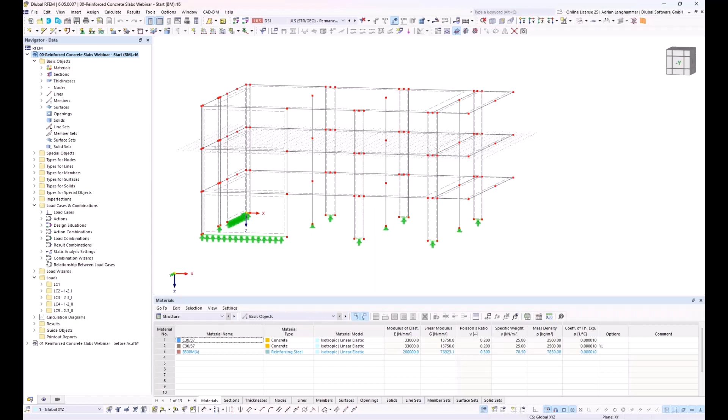So I will switch to RFEM, to our today's structure. This structure of today's webinar refers a bit to an older RFEM 5 webinar about reinforcing slabs and deflection calculation for slabs. That older webinar was a 2D position, today we show this based on a 3D structure.

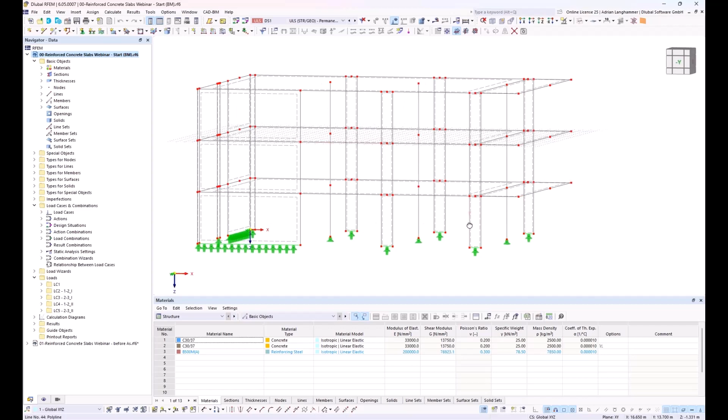This 3D structure has 3 stories. The slabs here in the right area are cantilevered. I have applied some simple but typical loads, a dead load and some live loads here.

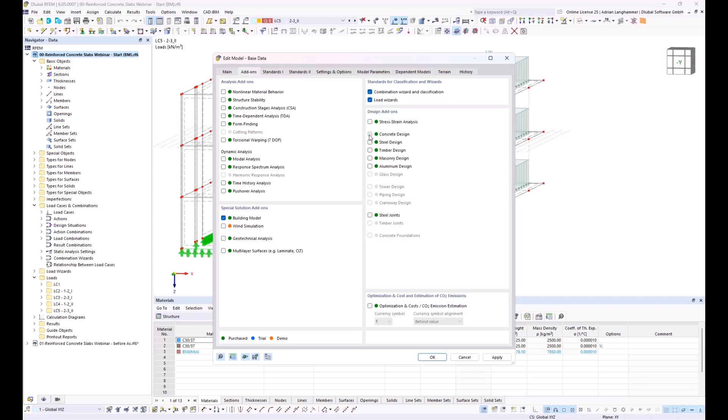In the beginning, I will use the building model add-on to consider the slabs not in the 3D structure, but separated in a 2D structure. Before that, I have to activate the building model add-on, which you find here. At this point, I will also activate the concrete design add-on, because we will need it afterwards.

With activating the add-ons, the input possibilities in the navigator change, and I have an additional entry called building model. I will start with the definition for the building model.

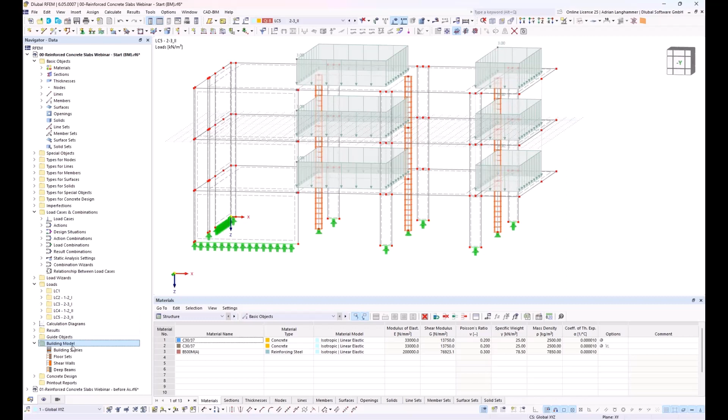First of all, I have to create building stories. I can do this by hand, or I can use this automatic function so the program automatically recognizes the stories and generates them. This is the button here.

Then I have to choose how I would like to calculate with this building model, and there is one option regarding the floor modeling, where I have to choose rigid diaphragm. This means that the walls and columns are connected via rigid diaphragm, and the slabs are considered as some kind of 2D position, as a 2D structure. It's not exactly a 2D structure, but it behaves like this.

For this slab, I have to choose how the attached walls and columns should be considered - they are considered as nodal supports and line supports. But here there's an option for how this should be done.

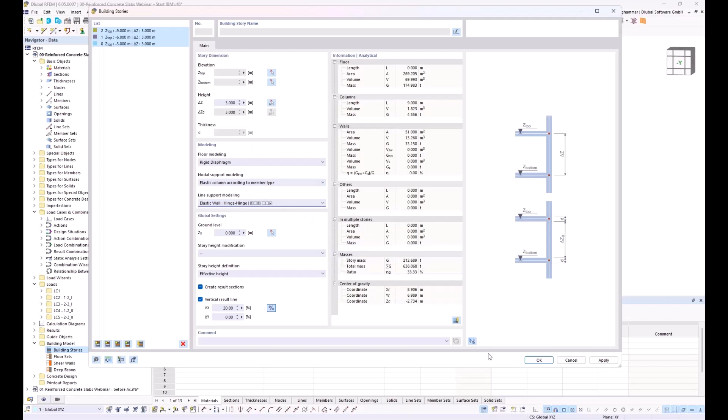So this is my input for the 2D calculation of the slabs. And then I could start to calculate the internal forces. This would need, let's say, half a minute or 1 minute, so I will save this time and switch over to a structure where I've already calculated the internal forces.

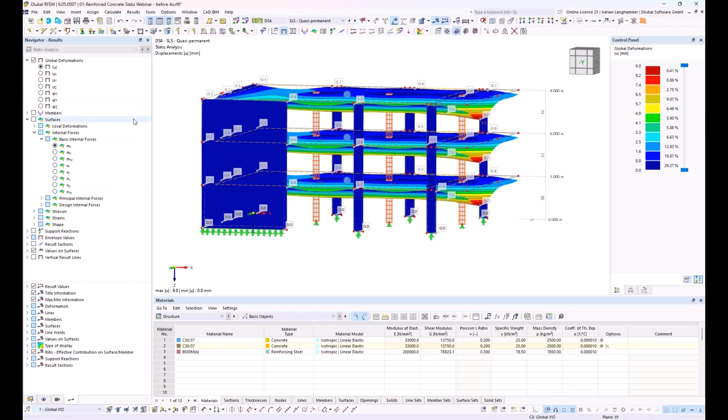And then you get results like, commonly for the statical analysis in RFEM, you get internal forces and deflections. But you have also an option, I can show it, where you could choose what kind of results you want to look at. So there are the common results from the 3D calculation, and there are the results for these, let's say, separated slabs. So these are the results which we use then for the concrete design.

Yeah, I also will show another point. The program, as I mentioned, calculates the walls connected via rigid diaphragm, and the floors as separated 2D positions, and it also calculates some load transfer based on a submodel which is calculated in the background.

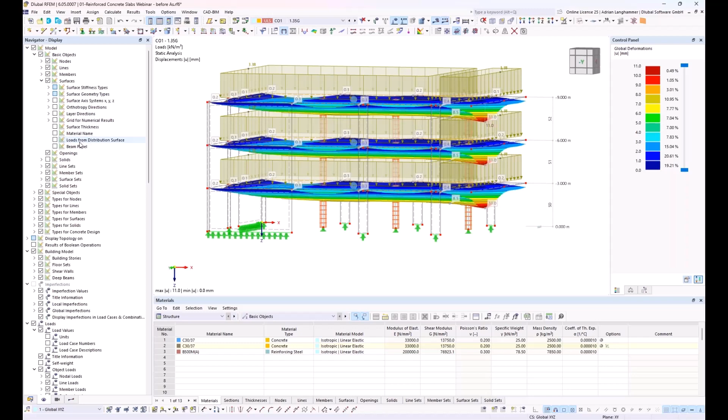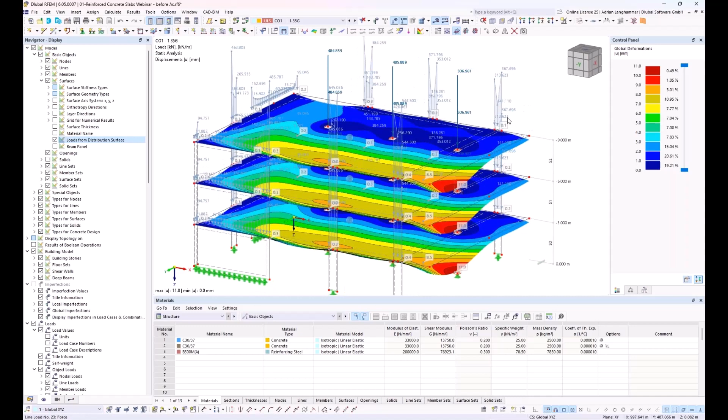And here you could see, if I go to the navigator display and the surfaces, I can have here an option, loads from distribution surface. So now I see the loads as I defined them as surface load, but I can also show how the program distributes the loads based on the submodel calculation. So I see how this surface load is distributed into the single parts of the structure.

Yeah, so this is our basic results which we use for the concrete design. And now I will start with the concrete design, and in the first step, I would like to calculate the required reinforcement.

I already activated the concrete design add-on.

The input for the concrete design you could find in, I would say, 3 main areas. There's an entry here in the navigator, concrete design, and there are the configurations with all the settings for the design checks, and also there's an entry for types for concrete design with input for the surface reinforcement, for example, and then there's also here in the table this point concrete design, where you could choose which objects you would like to design, and also which loads or design situations you would like to use, and so on.

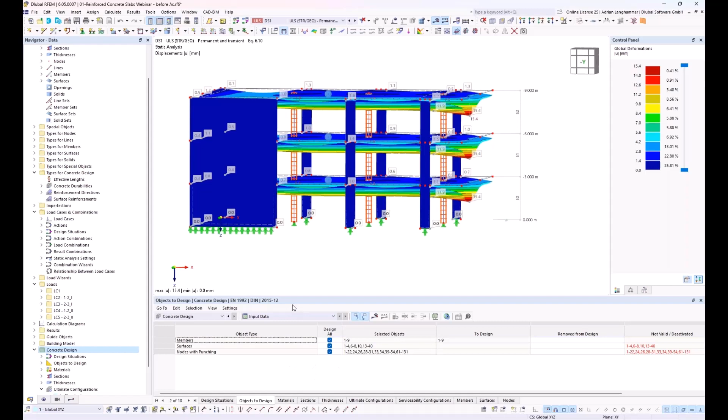So I will start, or I will do the concrete design for this slab in the middle here. So I show only this slab. I will turn off the results and take a look from the top side.

In the beginning, I will only design these 2 surfaces. So I will turn off the members and the nodes for punching, and I select here these 2 surfaces. And then I see here that they are at the moment not valid or deactivated, and the reason is that there is some input missing for the surfaces themselves. So this is, let's say, the 3rd area for the input.

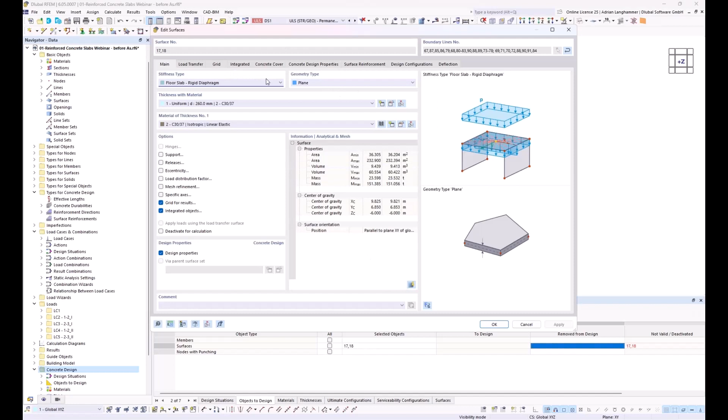The objects I've selected here for the design, in these objects I have also a concrete related input. So this is here. It begins here with the register concrete cover, and then the following registers.

So I can do here the input for the concrete cover. I could use it based on the standard automatically, or I could define it, or I could use it user defined. Then I have here the settings regarding reinforcement direction. By default settings, the first reinforcement direction is always located in the local X direction of the surface. I keep here everything as it is.

And then I go to surface reinforcement, and here I have to do an input. It is necessary to define a reinforcement or a surface reinforcement here. It is not necessary to do it absolutely accurate, but the program needs some diameter for the calculation, for example, and it also needs some input for the axis for the reinforcement, because these inputs are influencing the effective depth or the inner lever for the concrete calculation.

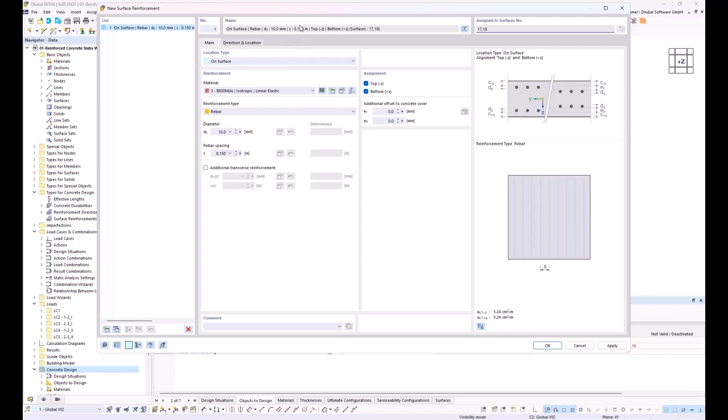So here I start with some basic reinforcement. I define a mesh Q424A at the top and bottom side for these two surfaces, and here I can see what the program then uses as an existing reinforcement. And I say OK or apply, both possible.

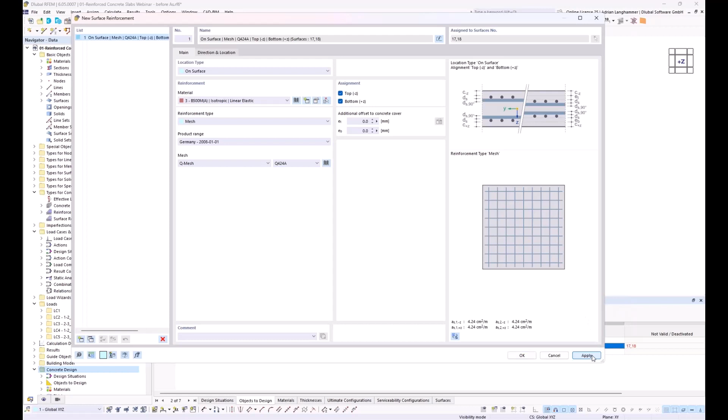In the background I see that the dialog is a bit behind, and I see that the surface is switched from not valid to design.

So I will close the dialog, and here in the next register, design configurations, I have the related configurations for the design, so the ULS and SLS configuration. And then the last register is about the deflection. This part I will show later.

So I will open the ultimate configuration and the serviceability configuration. First, the ultimate configuration. Here I can do settings regarding the ULS design, for example regarding minimum reinforcement, regarding shear capacity or shear checks, and so on. This is default. These settings are related for slab design, so I keep everything as it is and close it.

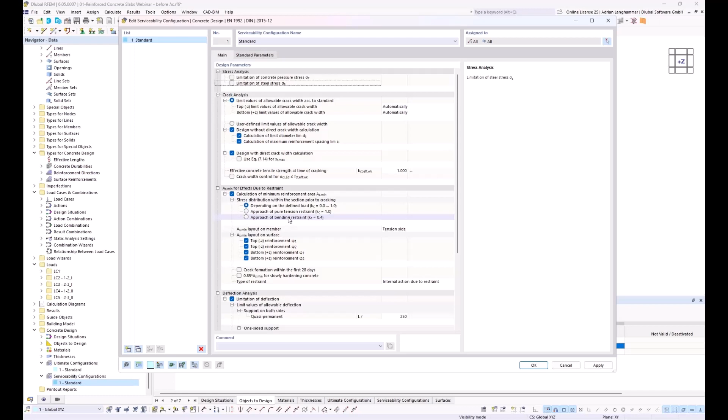Then I will open the serviceability configuration. It's quite similar. I have settings regarding the SLS design checks or for the SLS calculation. Here I would like to turn off the steel stress analysis because it's not necessary in each case. I also will adapt here the setting for the stress distribution for the effects due to restrain.

So I will use bending restrain because I know I have here a slab, and the program has some automatism or automatic function to determine the stress distribution based on the load, but this is not necessary if you know what kind of restrain you would like to consider, and I know that I would like here to consider bending restrain. At least I will deactivate the deflection analysis.

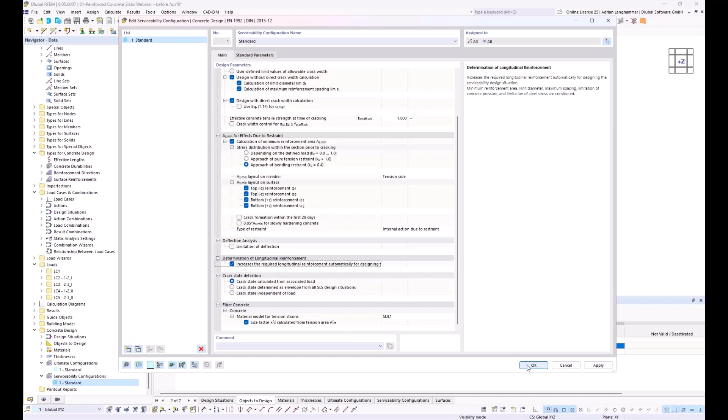This is an option I will use later. Then I have here this option which is activated by default settings, that the program increases the required reinforcement automatically also for the SLS, and here you have summarized for which design checks this is used. So I keep this option on because this is my first step. I would like to calculate the required reinforcement.

So now the input is done, and I could start the calculation for the required reinforcement. And as mentioned, the program now calculates the required reinforcement for the ULS in the first step, and then for the SLS.

And this is one way how you could work with the program. So this could be a step how you handle your structures by calculating the required reinforcement.

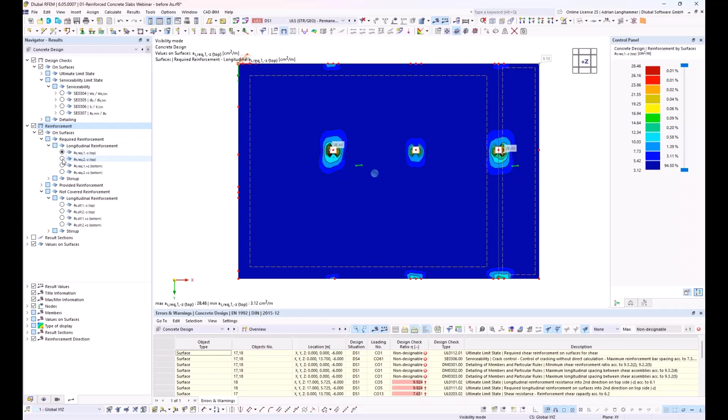When it is calculated, you have here in the result navigator for the concrete design this point reinforcement, and then you could have a look at the required reinforcement at the top side in the first and second direction, and at the bottom side also in the first and second direction.

At this point, it would be theoretically possible to document the results, and then you have your concrete design. But you could do also a bit more.

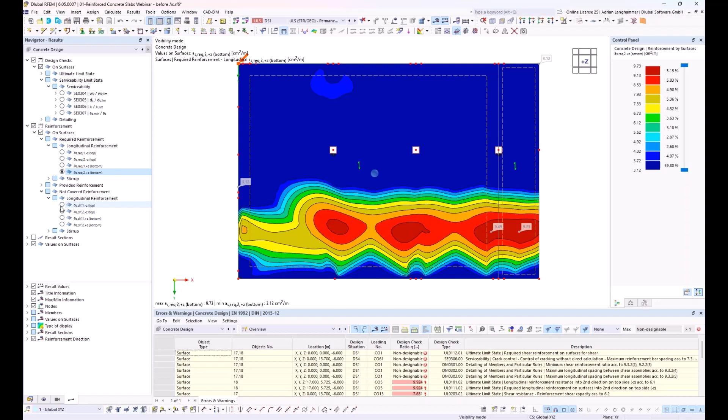But first I would switch here from required reinforcement. There's also another option, not covered reinforcement, which shows the difference between the existing reinforcement, which is between the provided reinforcement, which is the 4.24 square centimeter, and then I could use here this difference. So I see where this mesh, which I've chosen as basic reinforcement, does not cover the required reinforcement.

So based on this, I will do an input for the existing reinforcement.

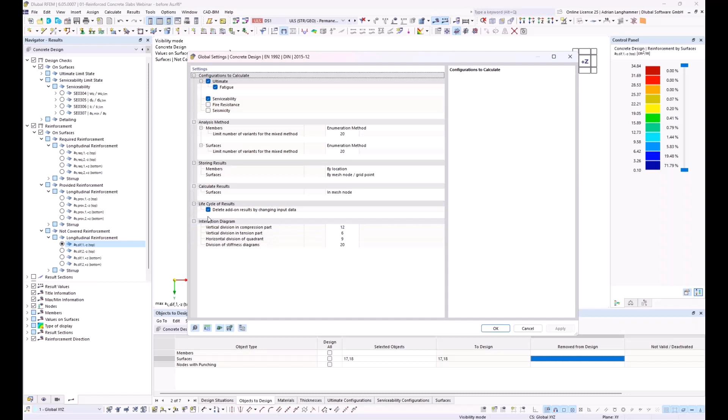But first, I would like to freeze these results because I would like to use them via input. There's an option here in the input data that I could say, if I change here something for the input, like the reinforcement, the program should not recalculate. It should keep the old results because I could use them via input, and then when the input is done, I could activate this again, and the program recalculates. So I turn this off, and then I will define the reinforcement, and I will start with the reinforcement above the supports.

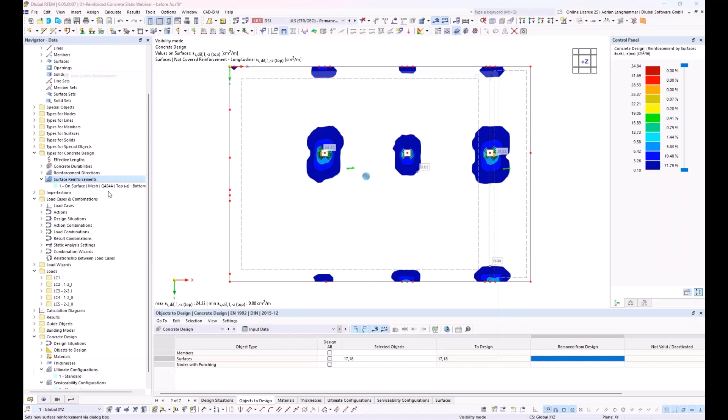And I have to go to the navigator, and here's surface reinforcement. There's also our existing mesh basic reinforcement. I create a new surface reinforcement, and this time not for the whole surface. I would like to use a free rectangular reinforcement only at the top side, assigned to these two surfaces, with diameter 20, and also for the transverse reinforcement, also diameter 20.

Then I would not do a direct input of the rebar spacing. I would use the automatic function, the automatic design of the existing reinforcement. So if I click here auto, the program automatically determines the rebar spacing. I have to give a minimum and maximum value. I keep the default settings, and for increment I use a bit larger increment, 5 centimeters, and I do the same for the other direction and say OK.

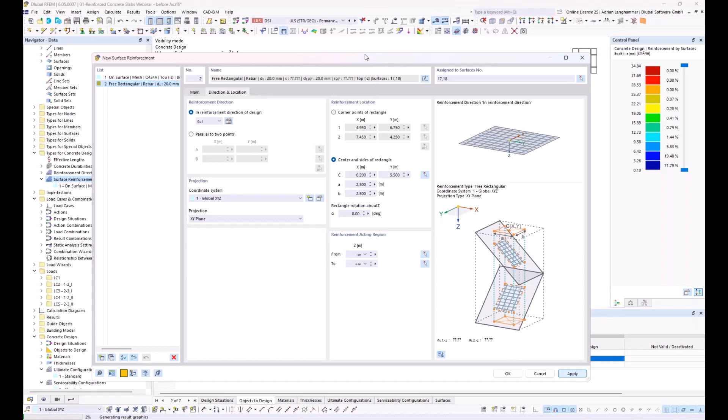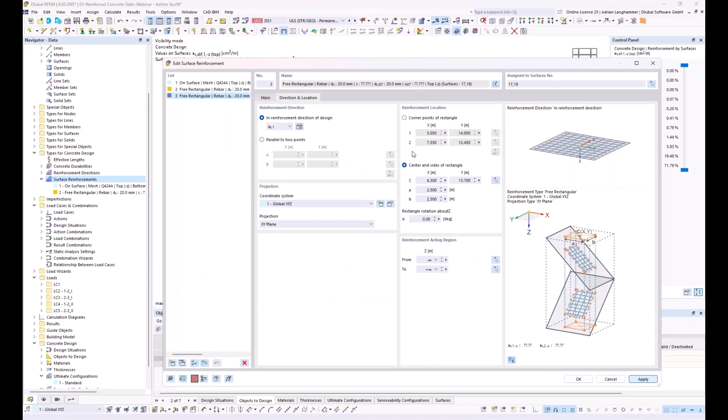And then it should show the reinforcement. I could also, to define the other reinforcement areas, use the copy function. So it keeps exactly the same settings, and then I only have to change the location here. I can click apply, and again for the other one here, apply, and then I have defined the other reinforcement areas very easily.

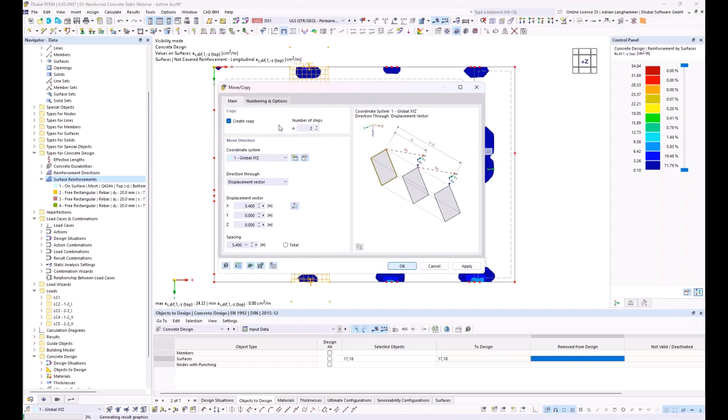There's also an alternative way. The surface reinforcement is like every other object in RFEM. It behaves like a surface or like a free load. I can select the surface reinforcement and use the copy function and say, for example, create 2 copies, and then I could pick my vector from start to end point and say OK, and then the program copies the reinforcement 2 times.

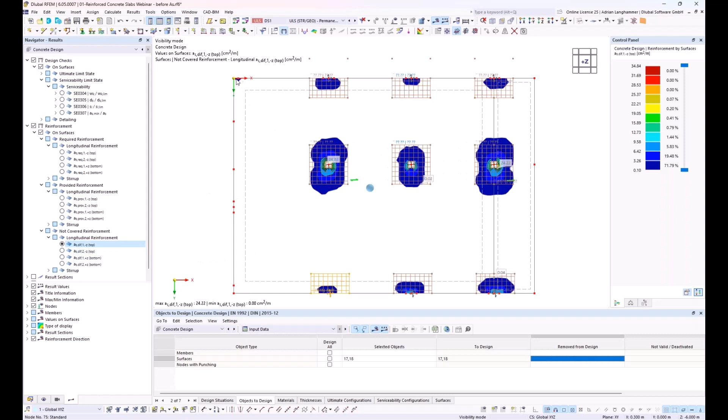I have here in this area also some supports where there is also some not covered reinforcement in direction 2, and I guess in the upper corner there's also a small area here. I would also like to use this reinforcement for the support, so I copy it another time for this point, and for this point, and for this point, and say OK. So now I have defined for all areas where not covered reinforcement is above the support, this reinforcement here.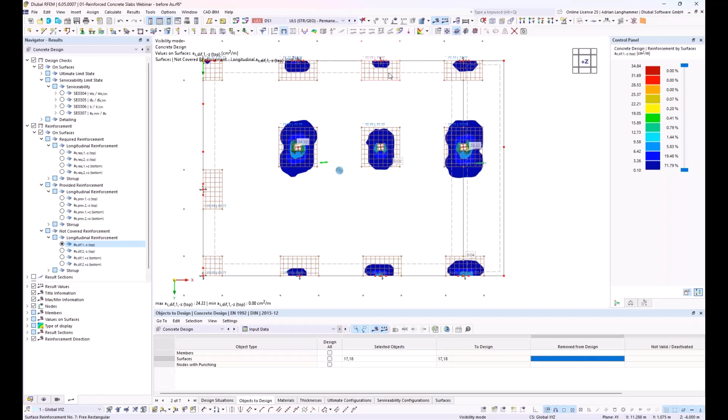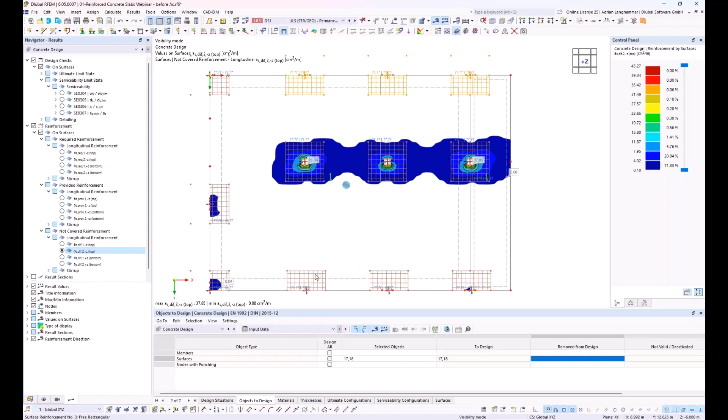It's not necessary to have for each reinforcement area 2 directions. For example, here these 3 upper columns, there is not covered reinforcement in direction 1, but not in direction 2. Also here, there is no required or not covered reinforcement in direction 2. I would like to show how you could adapt the reinforcement. So I could choose these 5 areas here, this 5 reinforcement, and say I don't want to use the second direction, and say OK.

Here it is the same. I forgot this, here it's the same. There's also not a not covered reinforcement in direction 2, and here for these 2 it's vice versa. There is no reinforcement in direction 1, or the not covered reinforcement is 0 in direction 1, but in direction 2 there's some not covered reinforcement. So therefore I could also adapt these two. It's a little bit different. Here I have to switch off also the transverse reinforcement, but I have to say that the first direction is not in direction 1, it is in direction 2, and say OK.

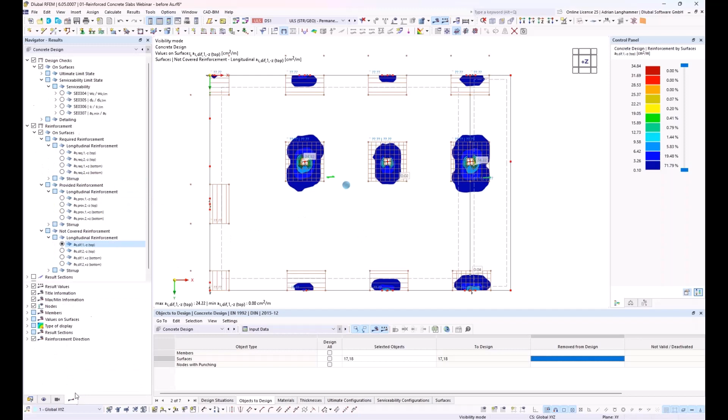And then I have everything adapted as I would like. There is some reinforcement here in between these supports, so I will create another area at the top side here. I say new surface reinforcement, rectangular. Choose these two surfaces, and this time I define the diameter and the distance.

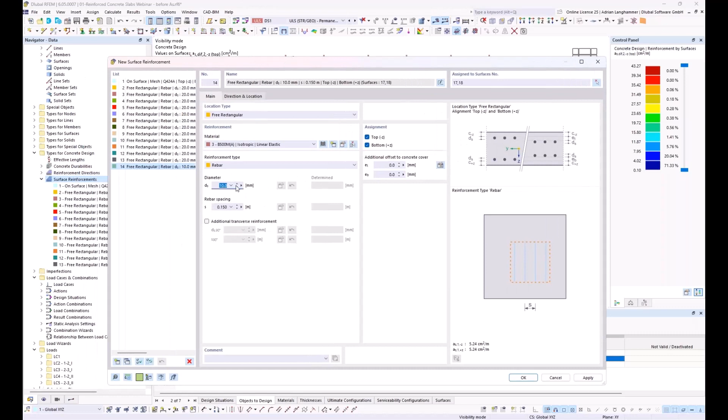I would like to use diameter 12 at 10 centimeters. Here also for the transverse reinforcement, and I have to check only at the top side. This time I use this definition by corner points. So I have a grid in the background, and I could here choose every half a meter. This grid could also be adapted. I use the grid with half a meter, so I can define it here graphically like this, for example, and say OK.

And then I have a, it looks... moment, I did some mistake here. You could always use the graphic to check if the input was correct.

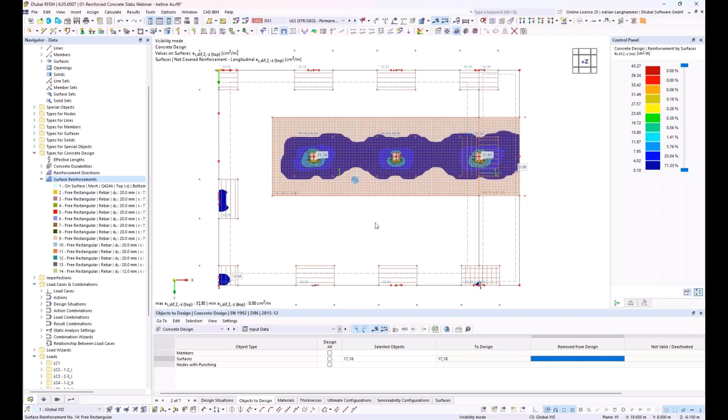And then I have to define also two reinforcement areas for the bottom side. There's an area here where a not covered reinforcement occurs, and also here in this area in direction 2, mainly, and also a small reinforcement in direction 1. So I define for these areas also an existing reinforcement.

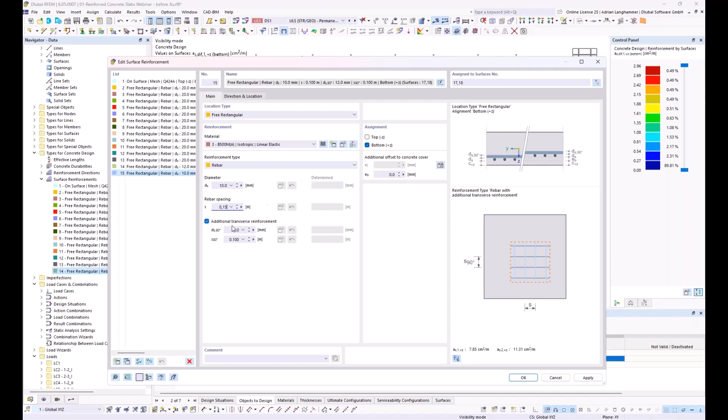This time I use the copy function again and copy my last reinforcement and switch to bottom. For the first one, I would like to use diameter 10 every 15 centimeters. In this area, let's say from here to here, and apply. I could check it, yeah.

And then another area, or another reinforcement at the bottom side here. In first direction, I would use 10 at 30 centimeters, and in the second, 10 at 10 centimeters, like this. And I use it for this whole area here, and say okay.

And then I'm ready with my input. So I could now start the calculation again, and with starting the calculation, the program will automatically adapt the reinforcement.

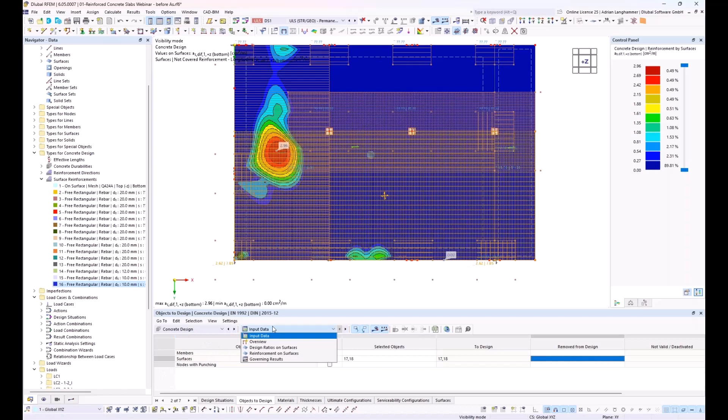So I go to the input data again, and I switch off this option. Say okay, the results are deleted. I could calculate again, and now I see that something changed a little bit for the calculation. I have now two concrete entries.

The first calculation is the required reinforcement. So with changing the reinforcement, there could be also changes regarding the inner lever arm or the effective depth, depending on the defined reinforcement. And the second calculation is the automatic design of the existing reinforcement.

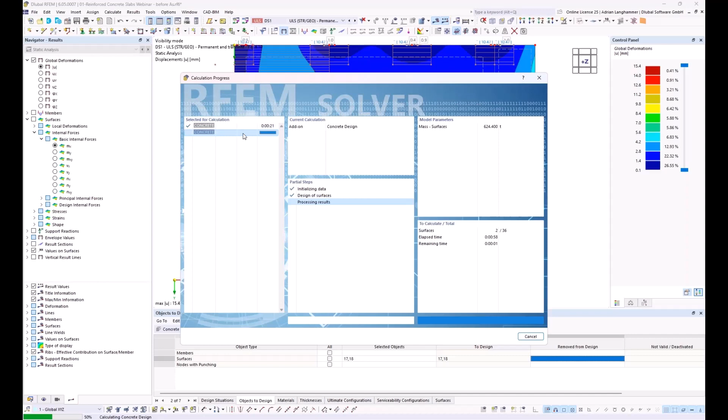So in this step, the program automatically decreases the rebar distance until the point that the required reinforcement is covered. There could also be the case that there is no solution, but then you should see the minimum distance. So in such a case, you maybe have to adapt the diameter, for example.

So now the calculation is done, and I could have a look at the results. Maybe I start at the top side with the not covered reinforcement. So now the not covered reinforcement is 0, and also in the second direction is 0. So in these areas where I used this automatic reinforcement, everything is covered.

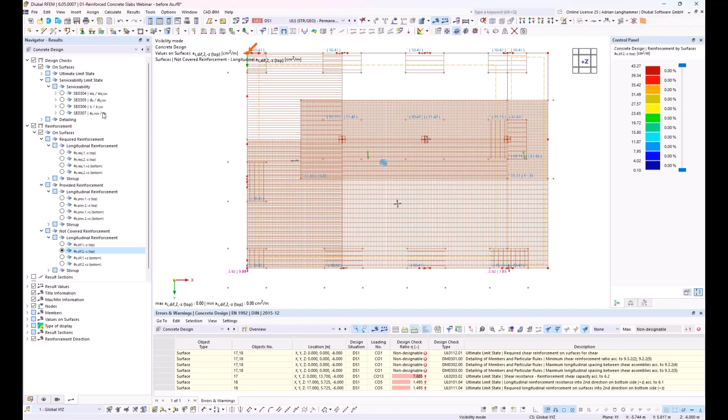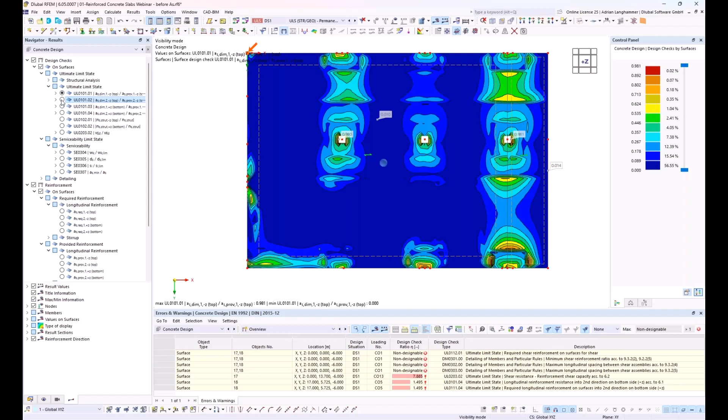So I see here the design check for the ULS. Everything is below 1, so everything is fulfilled at the top side here, both directions.

I could also have a look at the serviceability, at the crack-width design check, for example. I could here have a look at the ratio. The ratio is smaller than 1.

For the top and bottom side, I could have a look directly at the crack-width. So here I see the crack-width value in millimeters. At the top side, the resulting crack-width, and also at the bottom side.

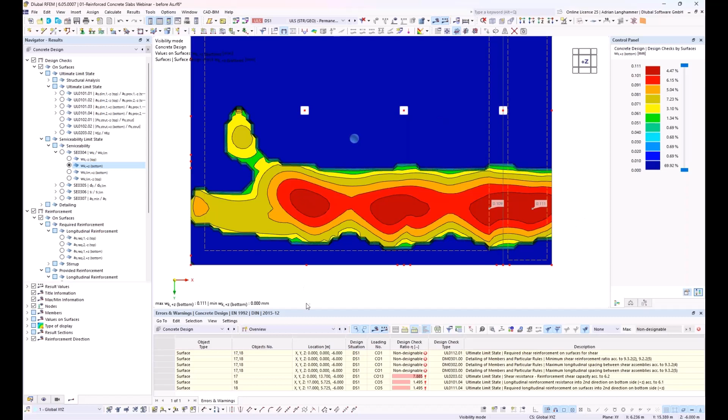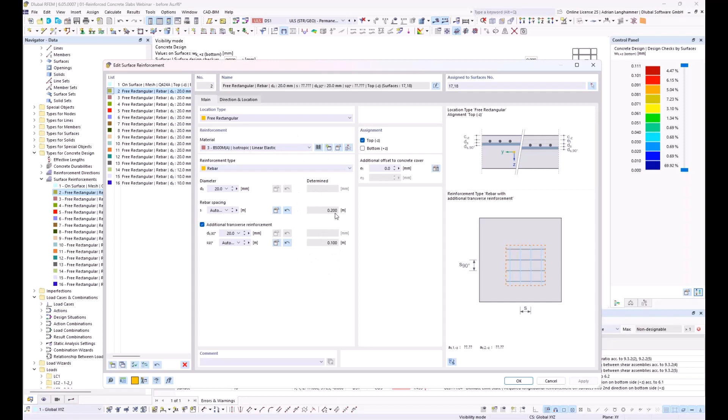So this should show the possibilities I have here with this automatic reinforcement. And if I say okay, the program determined this distance, I can see the value here which was calculated. The program calculated this value, and I would like to use it as an input now.

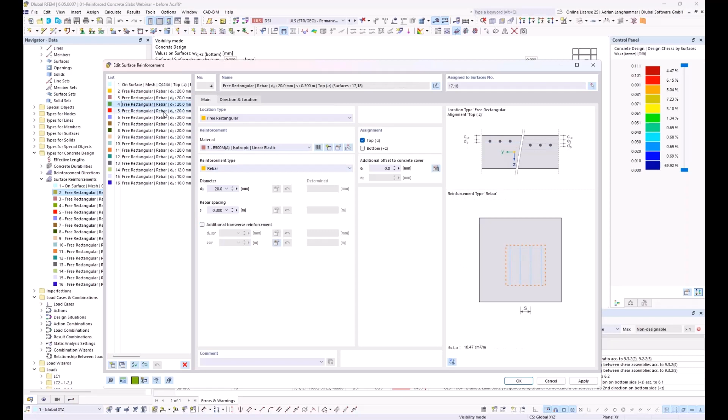From now on, I could select all these. I could do it for each reinforcement separately by clicking these arrows, but I could also select all these reinforcement areas where I used this automatic function, and say with this function it should use the determined value for the rebar spacing in the input.

And then I could say okay. And from now on, it does not need to recalculate the automatic function in the next calculation or for following calculations. So this is ready. The definition of the existing reinforcement is ready.

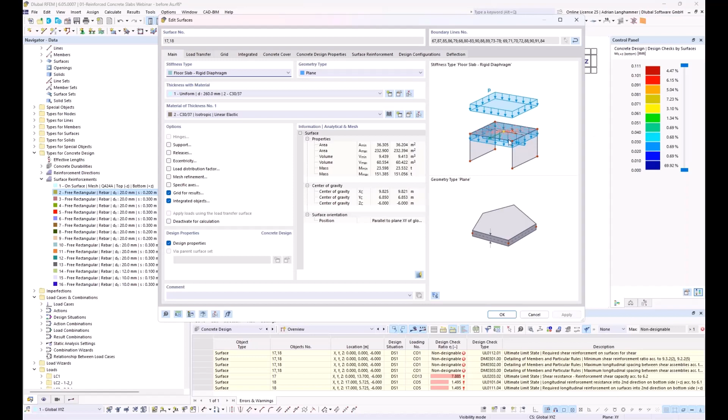Now, as a last step, I would like to do the deflection calculation and also the punching design. I will check at the beginning the input for the deflection calculation. I have to do it separately, one moment. There's an input here for this surface. Regarding the deflection, I could here select the surface type.

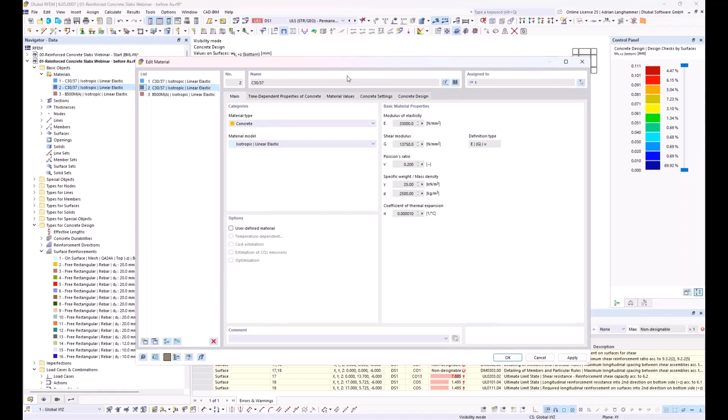I also have to check if creeping and shrinkage is activated. This is a material-related property, so if I open the material here, I have an additional register, time-dependent properties of concrete. Here I could activate creep and shrinkage, which is used for the deflection calculation. Here I also see the input for creeping and shrinkage, regarding the calculation I showed today. The creep coefficient diagram is for visualization, based on one thickness.

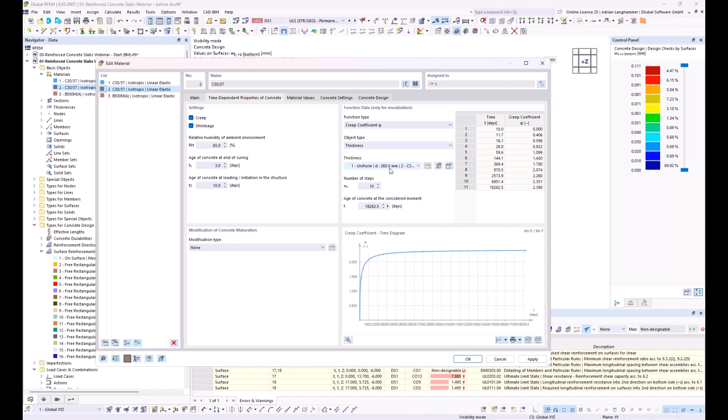So creeping and shrinkage is activated. The reference length for the limit value for deflection is defined, and then I could check the serviceability configuration. I can now activate the limitation of deflection or the deflection analysis. Here I see the different limit values based on the type of support of the surface, if it is a cantilever or both-side supported. It uses different limit values. Then in this step I will also deactivate the determination of the longitudinal reinforcement, because we have already defined our existing reinforcement, so I don't have to use this calculation again - this saves a little calculation time.

And I say okay - of course the results have to be deleted, but before I recalculate, I would also like to activate some nodes for punching. So let's say these 3 nodes or points at the columns should be used for punching.

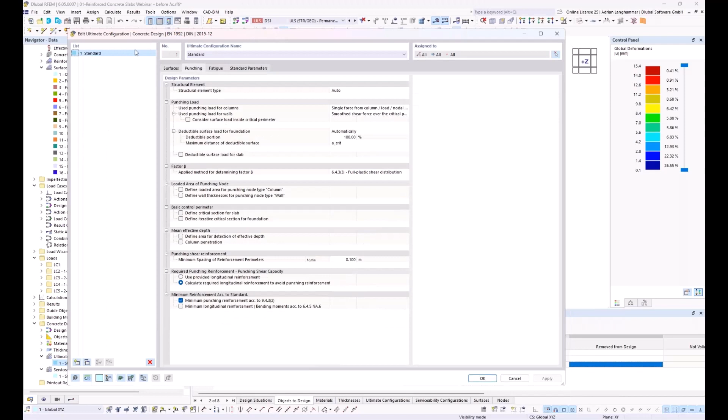Punching design is also like surface design - you have the object with the input, which for punching is the node. If I click on the node, you find that punching design is performed, and then you have a related ultimate configuration. With selecting some nodes for the design, I get this additional register for punching, where you find every option for the design, or how this punching load should be determined. There are a lot of different settings, but I would keep everything as it is and use the default settings.

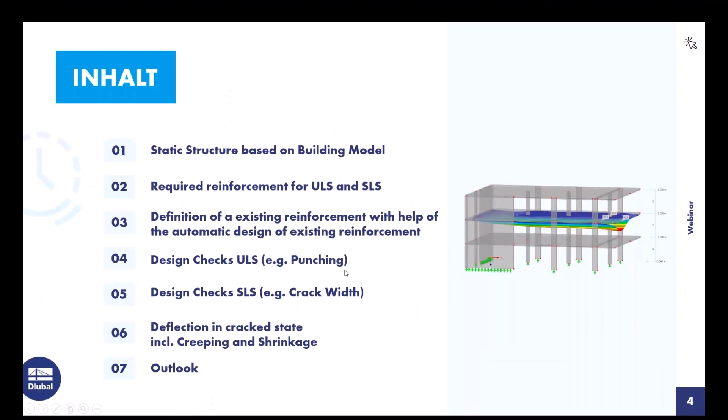And then I recalculate again. But I'll use this calculation time to switch back and give a short explanation regarding the deflection calculation we use here for our concrete design. This is the deflection calculation according to Eurocode 2, 7.4.3, and it's based on a distribution coefficient zeta.

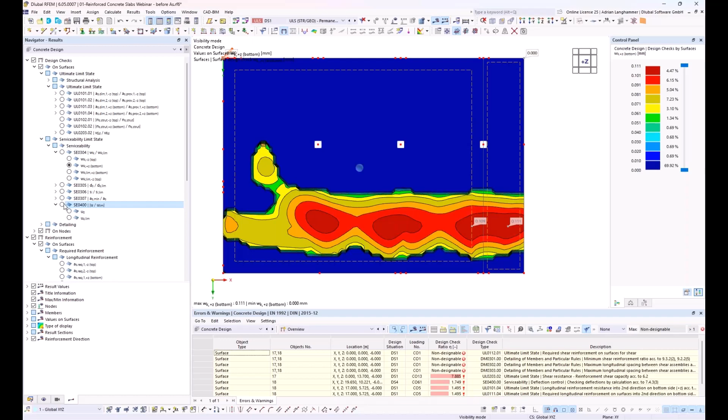So now the calculation is finished, and for the design checks I have an additional entry for the deflection calculation. I could have a look at the ratio, and I see the ratio for the deflection calculation, but I could also look at the deflection value itself. Here it says I have 4.6 centimeters of deflection, which would mean the deflection is not okay for this situation - it would be a bit too large. So there are different ways to handle it.

One possibility would be to increase the thickness of the slab. Maybe there's also an option to reduce some weight in this area. Of course, the longitudinal reinforcement could also be increased, or I would consider a hock for the formwork, so that I have a hock in the upper direction for the formwork to cover this deflection.

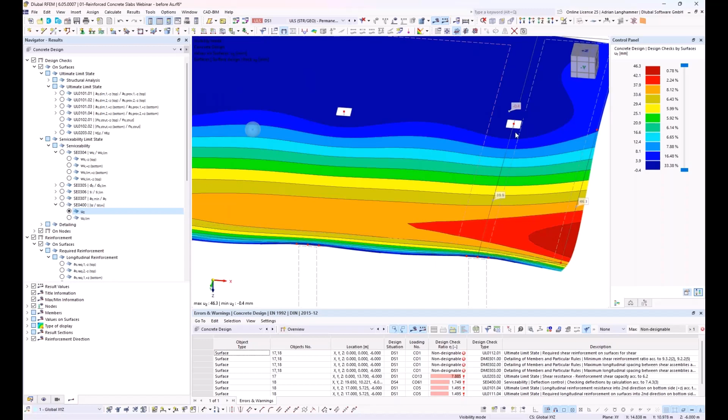I also could compare the deflection a bit. Here I have the deflection for the concrete design. I could also have a look at the uncracked state value for the deflection. If I switch back to statical analysis, quasi-permanent load, here I have the 9 millimeter, and compared to that I have the 46 millimeter, which is from the factor.

It seems plausible. I could also take a closer look at the deflection results in the design check. For example, if I look at this point here at the deflection calculation, I can see the detailed calculation with all the intermediate values. So the whole program is not a black box. You see every calculation step here.

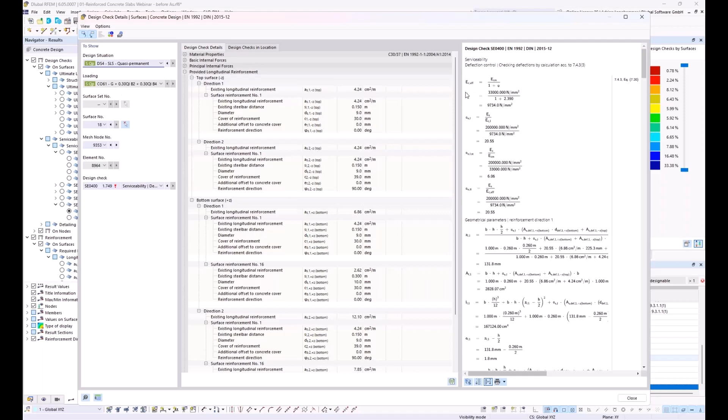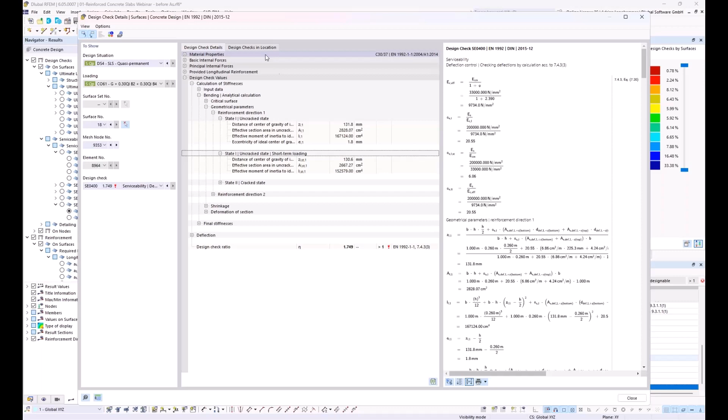Also for the deflection calculation, I could look at the calculation in uncracked state, in cracked state, and all the stiffness values. If you would like a closer look, showing these design check details is possible for all design checks calculated in the program, not only for the deflection calculation, but also for crack width and so on, also the ULS calculation or the punching design and so on.

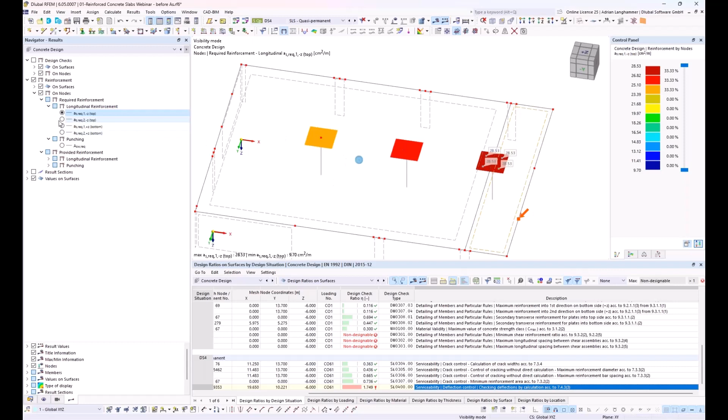In the last point, I would like to have a look at the punching design. If I use the punching design here, I have results on nodes where I could, for example, look at the required reinforcement for a node, like here, required reinforcement at the top side. The program with the default setting always tries to increase the longitudinal reinforcement to cover the punching. But I could also use the existing longitudinal reinforcement, and if that existing reinforcement is not enough, the program will calculate the required reinforcement for punching.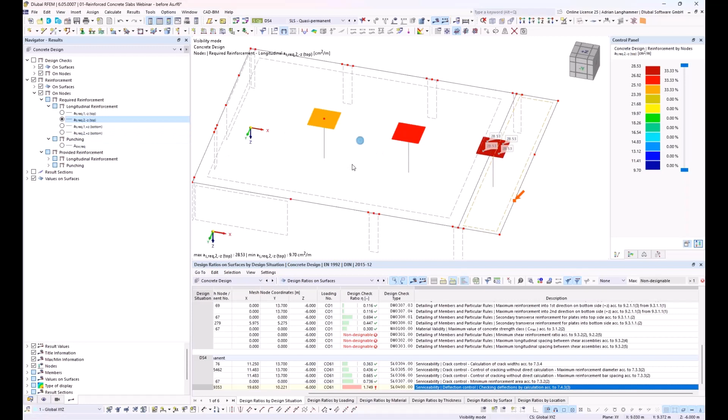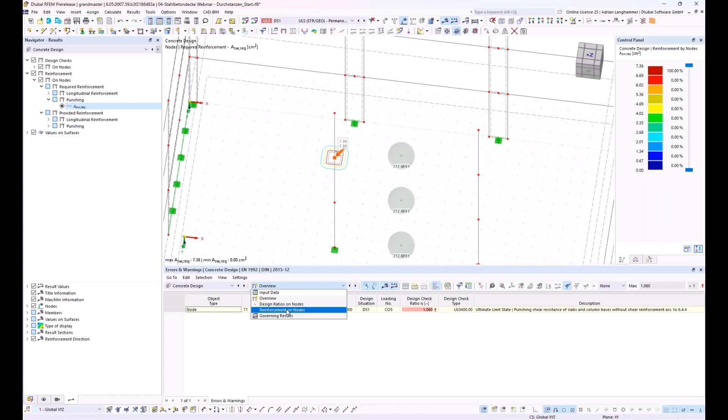Maybe this is a good moment to show a small look into the future at upcoming features. One next step which will be released in the program is punching reinforcement. I have prepared a small example of how it could look in the future. So if I have here, for example, a required reinforcement at one point, I could take a look at the required reinforcement at this node, and then see how much reinforcement is required at which distance.

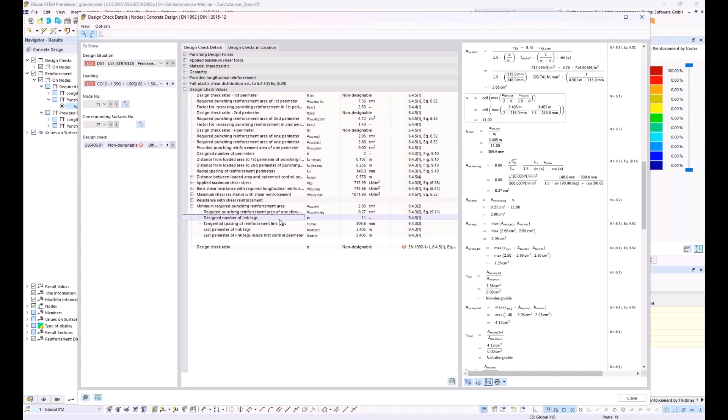I could also look at the details and, for example, see how many link legs I would need. So here, for example, it is 11, so to cover it I probably need 12. And then I could define a punching reinforcement.

This is in the types for concrete design. There will be an additional point in the future, in upcoming versions, for punching reinforcement, and I could create a new punching reinforcement here. I keep everything as it is, but I have to choose the node where the punching reinforcement should be applied. Then I could use the number of perimeters and number of legs in each perimeter. You see there will also be an automatic function in the future, but for this example I will do it manually. So number of perimeters, let's say 3, and number of legs in the perimeter, 12.

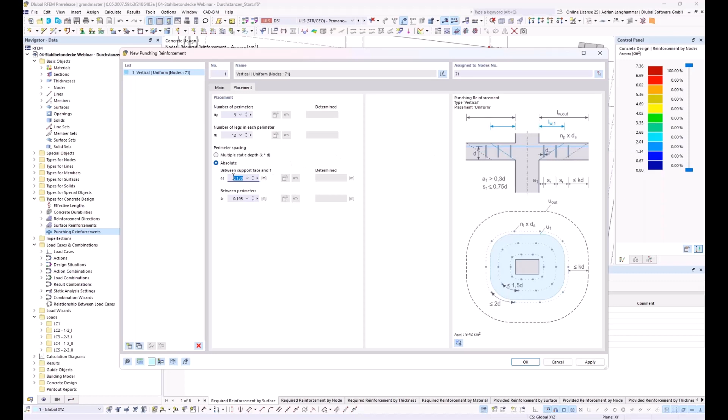Then the distance between the support face and the first perimeter should be smaller, I guess, than 0.107, so I would say 0.1 should work. And then the difference to the next perimeter is something about 11 centimeters.

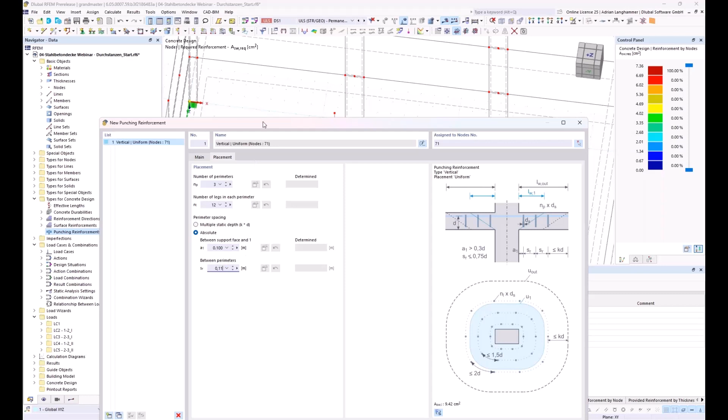And then I say okay, of course it needs to recalculate. And then I see here the reinforcement. I could recalculate the results, and now I see that the design ratio is fulfilled. So everything works here for the punching design with this defined punching reinforcement.

Yeah, this should be just, let's say, a small look into the future at the end.

And with this point, I will hand over to Alexander, and he will give you an overview about upcoming features.

Thank you, Adrian, for the presentation. Before I will start with an overview of the coming features, I want to give some questions to you, which were asked during the webinar, and I think these questions would be also interesting for everyone.

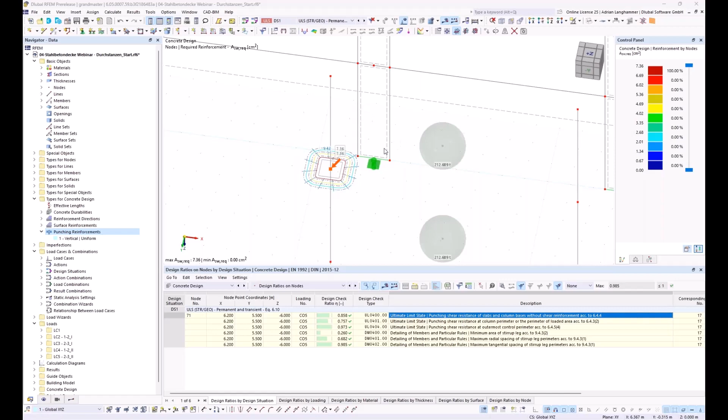The first question was about deflection calculation. Is it possible to consider the damage of the crack formation from a real design situation and calculate with the stiffness the deflection for the quasi-permanent loads? Maybe you can show it in the program. I guess it's probably related to this option. So if you would like to calculate the cracked state, not from the quasi-permanent, but from the real load situation...

You could use now in RFEM 6, this is possible to have this cracked state detection here. So as default, the program normally calculates with the quasi-permanent load. It calculates the cracked state, and then it calculates the deflection.

But it is also possible to calculate the cracked state from the envelope from all serviceability design situations. So like for the characteristic combination, the program checks in the beginning if an element cracks with the characteristic combination, and then it calculates the distribution coefficient zeta based on this load, and then the load or the deflection itself is then calculated with the quasi-permanent load.

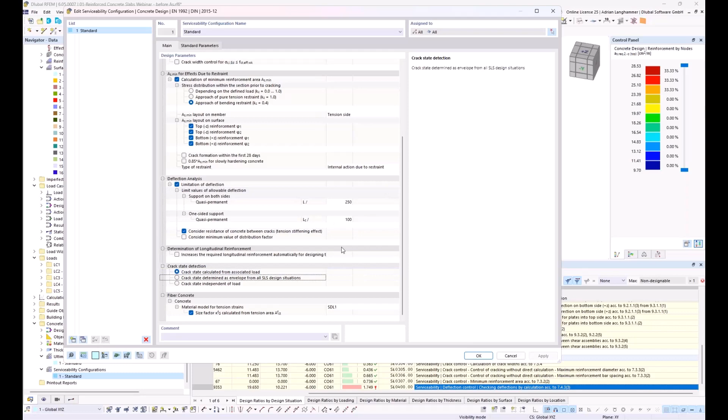Okay, and one question more what I would like to highlight is: you designed now one slab in the building, and the question was how to define the surface reinforcement for the remaining slabs of the building. What is here the recommended approach?

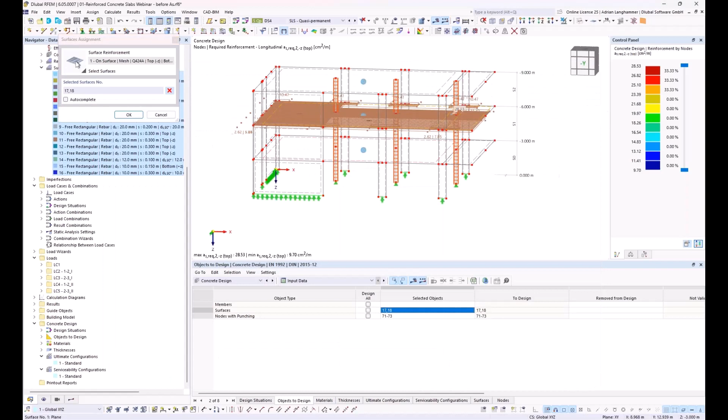Yeah, there are different possibilities. One easy way would be I turn on the reinforcement again. One possibility, it acts like with some kind of projection. So you could normally, if you would like to use the same reinforcement for the other slabs, you could select these slabs and just assign the reinforcement also to the other slabs, like here, like this. Okay. Of course, the results have to be deleted then.

This is one. Oh no, they don't have to be deleted. They have to be deleted when I choose also the surfaces for the design. So this is one possibility.

Another possibility would be to copy all these surface reinforcement and then assign them to the other slabs. So in case you do not have exactly the same reinforcement, but some kind similar reinforcement, you could copy the reinforcement and then adapt it for the other slab. So this is possible and should be quite easy.

Okay, super. Thank you for the explanation.

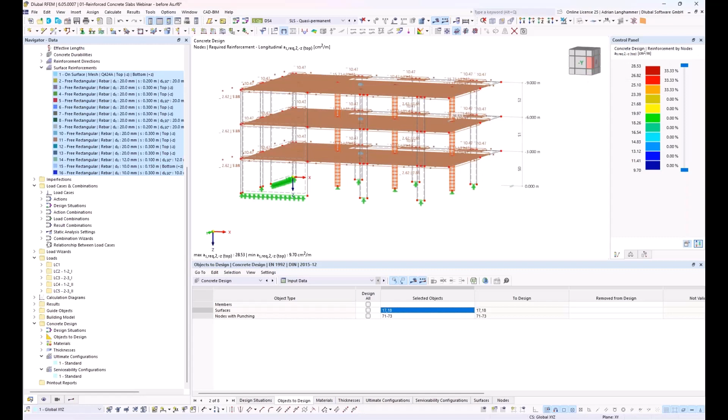I would like now to come to an overview of our current development projects and take the chance to give you an outlook to our upcoming new features for the reinforced concrete design. For this, I will take the monitor. So I hope now the right monitor is shown to you.

Yes. Okay, so the first feature which will come really soon is the definition of the punching reinforcement. It was already presented by Adrian, so I will go directly to our next feature.

The automatic layout of the provided member reinforcement. With this feature, it will be possible to determine the number or the diameters of the rebars in a member automatically by the software. So generally, it will work in the same way like the today shown layout of the surface reinforcement, and will be really a nice feature.

The next feature which I want to present to you is a very big development in our company, the physical and geometrically nonlinear analysis of reinforced concrete. We have here really a completely new concept, and with this new concept, the calculation is directly implemented in the finite element calculation of RFEM.

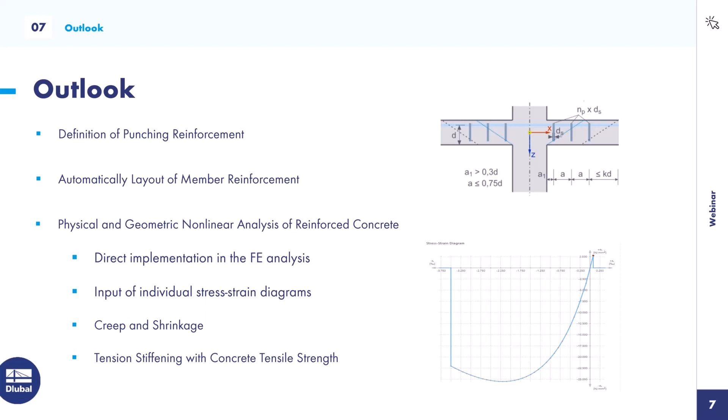The next topic in our development is the design of shear walls and deep beams, which will be automatically generated in the add-on building model. Adrian already showed the building model and how it works with the load transfer. With this building model, it will also be possible to automatically generate shear walls and deep beams as a design object, and these objects will then be directly designable in the add-on concrete. It will be a simplification for you.

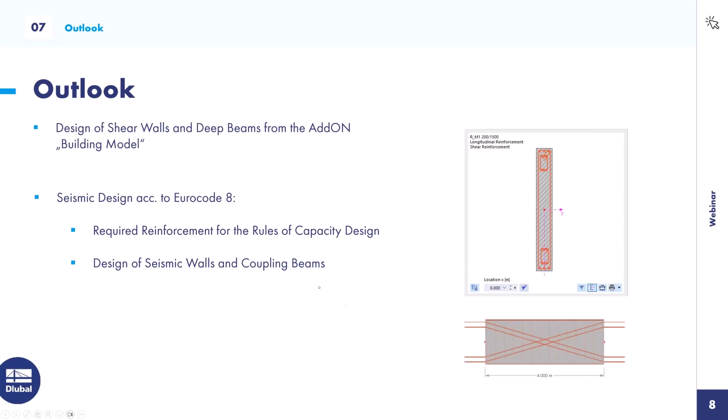Further, our team is working on the seismic design according to Eurocode 8. Last year we already released the design of reinforced frames, meaning the ductility, the constructive rules, and capacity checks like strong column, weak beam are already available in RFEM 6. Now we are working on the required reinforcement for the rules of the capacity design, and in parallel we are working on the design of seismic walls and coupling beams. In the image on the right side, you can already see our first draft of the input of the diagonal elements, or diagonal reinforcement, in the coupling beam, which will then be used in the seismic design.

The next project, which will also be released in 2024, is the fire design. For the fire design, we already released last year, at the end of last year, the design with the table approach according to chapter 5 from Eurocode 2 for columns and beams. The design checks for walls and slabs will really be released soon, and it is in the final testing state. Currently we are developing the fire design according to the zone method from Eurocode 2, and for this we developed our own thermal analysis of sections. You can see on the right side some isolines, the results of this thermal analysis, for example after 90 minutes.

Finally, I want to mention one of our high priority development projects, the new add-on concrete foundations. With this add-on, it will be possible to design single foundations. Currently, the geotechnical design checks according to Eurocode 7 are almost implemented, and we are working now on the calculation of the required reinforcement according to Eurocode 2, and also on the graphical user interface. This add-on will also be available or released this year for you.

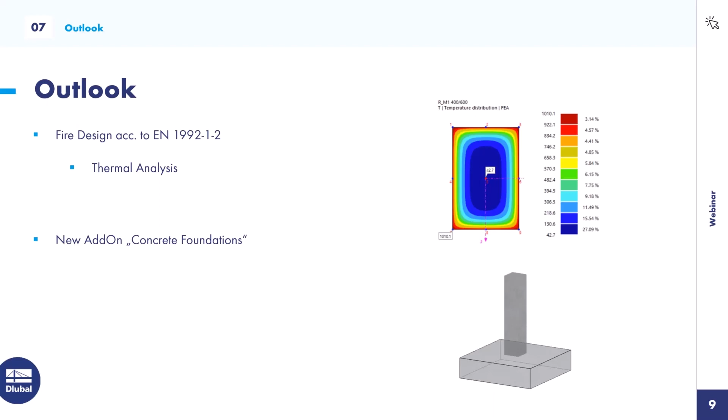So as you can see, this year 2024 will be very exciting for reinforced concrete design.